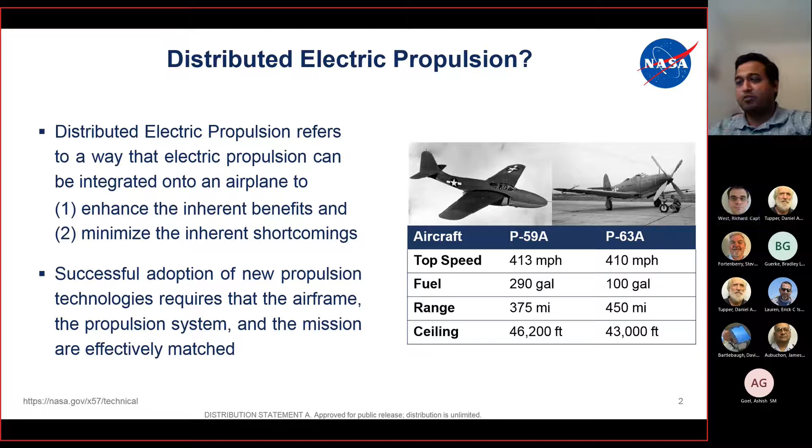So I have a couple of examples here for actually fuel-driven aircraft. So one is the P-59A, the other is the P-63A. If you can see, I'm not going to go into the range there. It's just their specifications that's listed. So we'll compare this as we go forward. So this is one of our reference points.

So moving on to the next slide, it's talking about the X-57 Maxwell as well. So to begin with, this airframe already exists. So it's one of the most successful twin-engine propeller-driven airframes that exists already. It's called the Tecnam P2006T. So it's an Italian-based airframe. It's manufactured in Italy, and it's like one of the tried and tested reliable twin propeller aircraft around in the market today. So the reason NASA chose this is because this can be easily customized.

And by tweaking the airframe of the P2006 Tecnam, NASA is trying to demonstrate the X-57 Maxwell design, which is the first all-electric experimental aircraft that the agency has produced in its X-plane series. X-plane refers to a series of experimental planes that were designed by NASA for different purposes.

For example, in one of my previous presentations, I talked about QueSST, which is the quiet supersonic version of the aircraft that's been created by NASA for experimenting as well. So this is one of the X-planes. It's like an ongoing research. One of the latest things that are going on in parallel with QueSST as well.

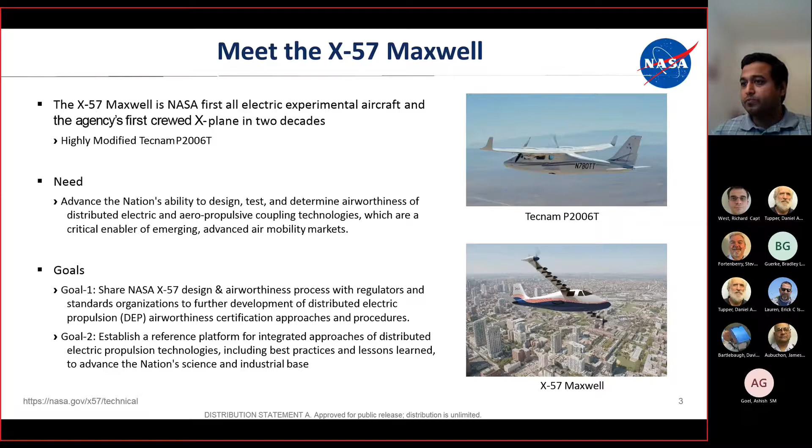So the next goal is to establish a platform for electrical propulsion. So by studying that, you can always get the best practices and you always learn lessons from it. So that's the two goals of it. So NASA is not looking to mass produce this at this point. It's just going to be an experimental aircraft where we can learn a lot of things so that other manufacturers can actually use it in the future.

So this is a big project, spread across various NASA locations. For example, NASA Ames, we are very well known for our wind tunnels, so aerodynamic analysis is happening here. But as you can see, there are other NASA divisions participating as well. The big one here is the Glenn Research Center, where most of the battery related technology and research is happening. And then Langley and Armstrong have their other facilities where they look at the instrumentation part of the aviation as well.

And there are other organizations here. The most noted one is the last below, Tecnam. Tecnam is the airframe that we're going to use. It's the baseline commercially off the shelf airframe that's available in the market today, as I said. So we are pretty much distributed around the country and even in Italy, so across the globe.

So the research study so far says that we can achieve 5 times improvement overall. And if you see, the efficiency of an internal combustion engine aircraft or a propeller driven aircraft is in between 30 to 50%. So we are trying to increase this to somewhere close to 90% or more. And that's where electrical propulsion comes in; that's one of its selling points. So we have to understand a term called lift to drag ratio here. We are trying to improve that.

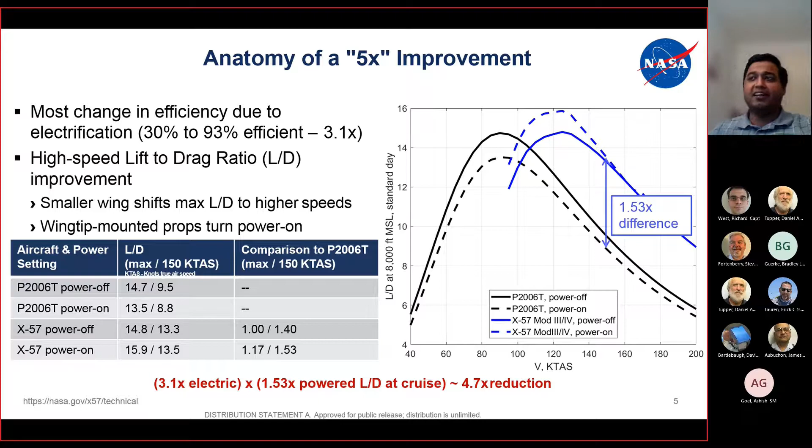So one of the things we are doing is altering the shape of the wing. The lift part and the drag part are mainly controlled by the shape of the wing. And of course, in almost all aircraft now you can alter the shape of the wing by using the flaps, right? Depending on what part of the flight you are on, whether you are on a landing profile, takeoff profile, or cruise. So basically, that's what we do here as well. The beauty is that lift to drag ratio is directly dependent on the shape of the wing. We will explain that in detail in the following slides.

So as I said, wings make all the difference. If you see the airframe of the Tecnam P2006T, the area of the wing is 159 square feet. And there is a term that we should understand called wing loading. In aerodynamics, wing loading is the total mass of the aircraft divided by the area of its wing. So we can say they're directly related.

Consequently, faster aircraft have higher wing loading than slower aircraft, which is why you see in jet aircraft the wing is more swept. Slower aircraft, like the Cessna 182 we use, have straight wings with a sweep angle of almost zero. That's one of the wing loading parameters as well. And so the point is we have to increase wing loading to achieve efficiency and weight distribution as well.

But unfortunately, we cannot change the shape of the wing as it is. It will compromise other things. It will really impact your takeoff distance, for example, your runway length, landing distances as well. So it's not straightforward. That's why we have to couple this with distributed propulsion as well, which I will dwell on in the next slides.

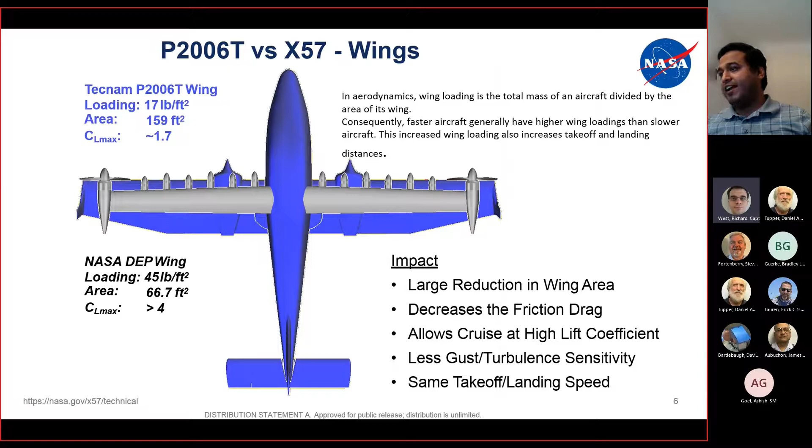So if you want to achieve the same lift with a shorter wing, you need more speed, right? So you need more power. So we have to match the Tecnam airframe's takeoff and landing speed. So we have to modify our wing loading accordingly.

So what NASA has done is they have actually broken this into several phases. They call it crawl, walk, and run. You see that there are different mods here: mod 1, mod 2, mod 3, and mod 4 for X-57. We start with mod 1 to collect data. This is going to be with the Tecnam profile. Nothing is changed here. It still runs on fuel. The wing does carry the fuel here. It's just the stock aircraft from Tecnam. We are going to fly that and take as much baseline data as possible.

Moving on to mod 2. Mod 2 is also relatively close to mod 1, but the only difference here is we replace the fuel-driven propeller engines with motor-driven engines, and we collect data for that as well. That is another baseline for electric-driven propulsion. But this is again not efficient at this point because we have not customized the aircraft totally for efficiency. So that's where mod 3 comes in.

Mod 3 is where we have independent propellers assigned underneath the wing. At this point, the wing is changed as well. And what you can see in mod 3 is the same electric motors are actually installed on the tips of the wing rather than the internal part of the wing. And that gives you one set of data as well.

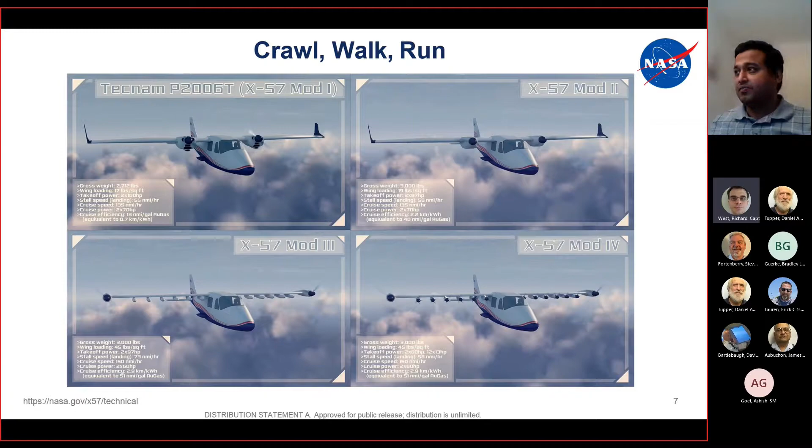So finally, we try to get to mod 4, which is close to what we are expecting in terms of our research. Our research culminates at mod 4. What happens here is we have distributed propulsion systems that are outside, and they rotate as and when power is needed during a phase. And so those are the four mods, or four phases rather, for Maxwell X-57.

So this slide talks about the motivation. There are a lot of barriers in electric propulsion. It's not easy. It's not like just installing a motor to a wheel in a Tesla car, for example. The challenge is much more. We have to see the battery density as well, and it's very easy to deplete the battery in mid-air because of the battery density. You have to fight with mass, you have to fight with energy density as well. So choosing something that's going to be optimum is really tough research that's going on right now.

So as I said, we have weight, safety, and flight environment challenges, which complicate our battery design, especially when we are using COTS technologies, that is commercial off-the-shelf technologies. What we need is a high voltage lithium battery series with intrinsic propagation prevention and passive thermal management. I'll tell you why these two things are really important, because as opposed to a car, this is going to be on an airplane.

So we cannot accept any kind of explosion or fire that's going to occur in the battery because of its thermal properties or short circuits or other electrical phenomena that happen around the batteries. So even if something deforms on the battery side, we have to make sure that we contain it within the shell, and it's not going to propagate all through the aircraft. That's another thing. We have to establish motor, inverter, ground as well during the flight test program. That is to make sure that we don't have any leakage current coming around.

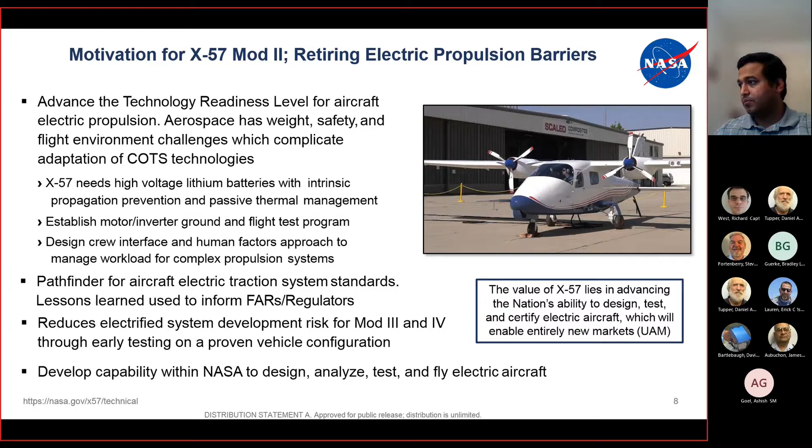So I had briefly touched upon it in my previous slides, but the cruise motor has a lot of challenges that we have to address as well. So we have to look at design standards for electrical propulsion. We don't have one established right now. We don't have a sourced electric motor already in the market right now which can be put in, so we have to develop this motor from scratch. We have to design it and we have to test it as well.

We anticipate it's going to be a dual winding motor architecture for aerospace applications. So we have to make sure that this motor mitigates the effects of component failures. So we do require extensive validation as well. And for the testing standards, X57 developed an electric motor testing approach. So again, we document everything in our lessons learned. And also there's a testing standard called ASTM F39.05.

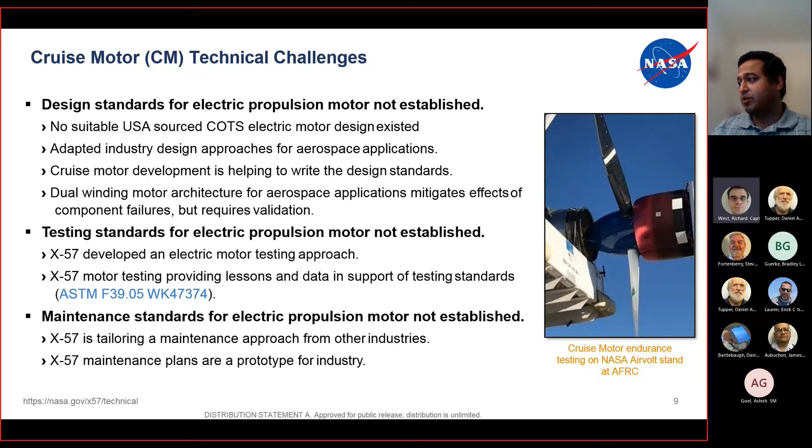So coming to testing, testing is just one point. What happens after deployment? We have to maintain it, right? So we have to maintain the standards for electric propulsion for X57. That's something we have to take care of as well. So even after this aircraft has been deployed, we continuously keep studying it so that we can establish the maintenance standards as well.

So the flight motor, as you can see, is already in Rev K, which means a lot of design has occurred from scratch. The prototype is evolving, and we have the 11th major design iteration as of now. So we have to cool the electric motors as well. We are using passively cooled technologies like air cooling for the motors right now, and we are studying the data we observe from that in terms of heat management. Performance of the motor, efficiency and torque, are difficult to capture due to electromagnetic interference and high frequencies being present in the data. So we have to make sure that we shield that.

Of course, coming to motors, although it's simpler than an internal combustion engine, it's still a laborious process in terms of winding and getting the stator and the rotor in place. The magnetic fields in the motor, they're all very challenging things that we have to address. I'm not sure what kind of motors they're going to use. I think they're going to be some kind of DC series motors or some kind of motors that are high speed. So I'm not really sure on that point, but I can elaborate on it as I get more data in other presentations.

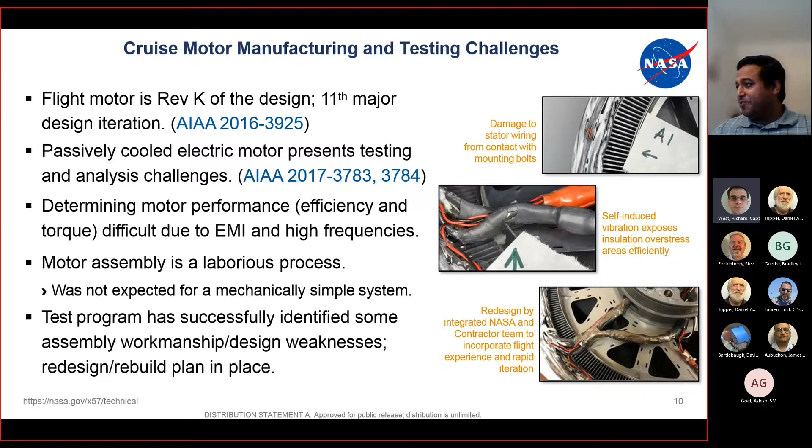Kailash, can you just go back a slide just a moment? Sure. I just really have to appreciate the caption on that second photo there. Self-induced vibration exposes insulation overstress areas efficiently, which is pretty much NASA speak for the damn thing shook itself apart. Yeah. Thanks for highlighting that. I did not go over that, but yeah, I thought that those were very specific to motors and windings. So yeah, thanks. Good that you brought it up. Thank you.

So we have to have a motor controller as well for driving these motors at different speeds according to the profile of the aircraft. Electric aircraft operation requires high efficiency power conversion from the battery to the motor. So we have to have a very capable motor controller to do this. Again, we have technical challenges in this. What kind of technology do we use? One of them is using a silicon carbide based MOSFET, which is nothing but a switch. It's a high speed switch that's going to change the power levels to the motor so that the speed can be controlled.

And then the next one is, of course, the cooling. So cooling is something which we have to address. At this point, we are looking at passive cooling, but we have to see how it proceeds. Then we have safety critical software that controls all these things. Software has been our pain point in NASA missions, especially with Boeing, right? Software has been an issue not to skirt over. It's completely powered by electric motors and they are controlled by software. So extensive testing is needed at this point as well.

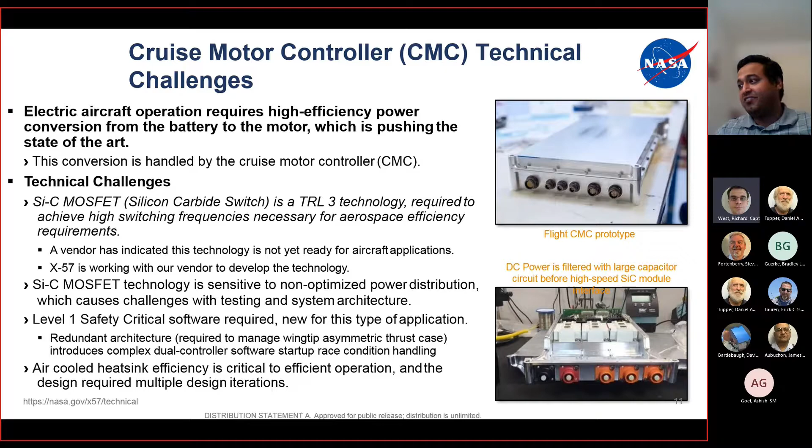So what we are looking at is, again, a very, very important thing in aviation, redundancy. So how are we going to achieve redundancy here? I'll come to that. I have a separate slide on that. So just food for thought at this point, we need redundancy for everything. That's how we do things in aviation.

This slide talks about the challenges in manufacturing and testing. So manufacturing challenges, as I told you, few COTS components. The airframe itself is a COTS component, but several other things are not. Coupled to that, we have long component lead times due to high demand and limited production. Of course, there are subcontractors. The scale of the project is like that. Not everything can be done within NASA in-house, so they have to port so many others. The supply chain comes into play as well.

So NASA engineers and aircraft electronic technicians and contractors are working to bring this project to life. This is not going to be done in one iteration. We have to build the data and test it over several iterations to achieve it. Other testing challenges, again, prototypes. We have to manage our risks. In early iterations, you have more risks. So we have to develop a risk reduction testing framework. And also flight-like testing is difficult to achieve because we have high power requirements here for motors.

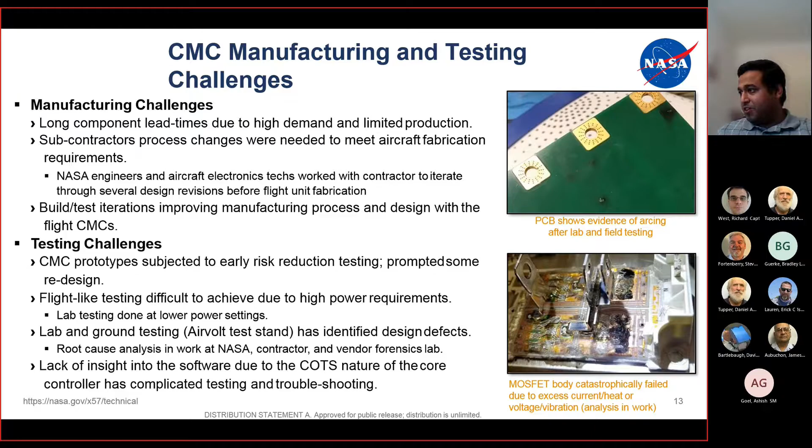So this is the main thing, the flight batteries, the testing challenges and the technical challenges. So as I said, the number one challenge is we don't have a commercial solution yet for battery systems. So we don't have a stock battery like what we have for the Tesla cars. Even Tesla took several years to actually come up with one, right? So yeah, battery technology is something which is evolving day by day, and the learning curve there is pretty huge.

So what happens when we consider a battery for an aircraft or airframe? So we require high power requirements with flight weight limitation. So we have to achieve 461 volts at 47 kilowatt hours effective capacity, and at least supporting a load of 859 pounds. That's 16 modules and 51 pounds each. So there are 16 battery modules which you are looking at.

So aircraft propulsion requirements drive design solutions to a higher voltage and current rather than the comparable automotive or auxiliary aircraft operations. So as I said, right, the profile for aircraft is going to be way different than an automotive. We are looking at an industry target of 30% packaging overhead that aligns with the budget.

The other thing we have to look at is the thermal runaway aspect of the battery. So thermal management has to be looked at as a critical design driver for X57. So we have to make sure that the batteries are cooled, the motors are cooled as well. So if we don't cool it, there is a chance for thermal runaway, and there's a chance of a fire hazard that's going to happen during flight. And for that purpose, we have to monitor that using a software and a control system.

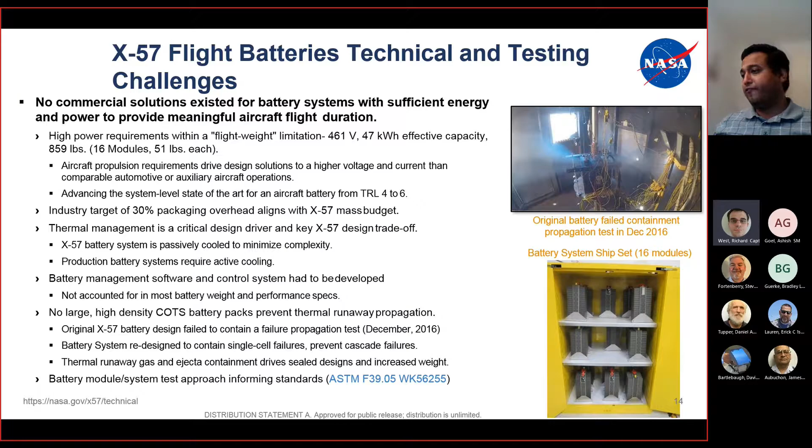So this is what has occurred during the first propagation test that was conducted. So they had to completely redesign the battery system to contain single cell failures, as I said. So a fire can happen, but you have to contain it within the case of the battery itself and make sure that it doesn't propagate anywhere outside to another cell or to other parts of the aircraft. Extensive module system testing is required here as well. So that's the standard there. You have to achieve ASTM F39.05.

So what started as an original approach was inadequate, so we had to move on. So the major lessons learned there were in the aviation battery development. So, for example, use of lighter, more energetic cells can pose greater safety risks. Cooling of cells while minimizing cell-to-cell propagation is also a risk. So containment of gases, that's another safety hazard here. That, and then thermal management and containment.

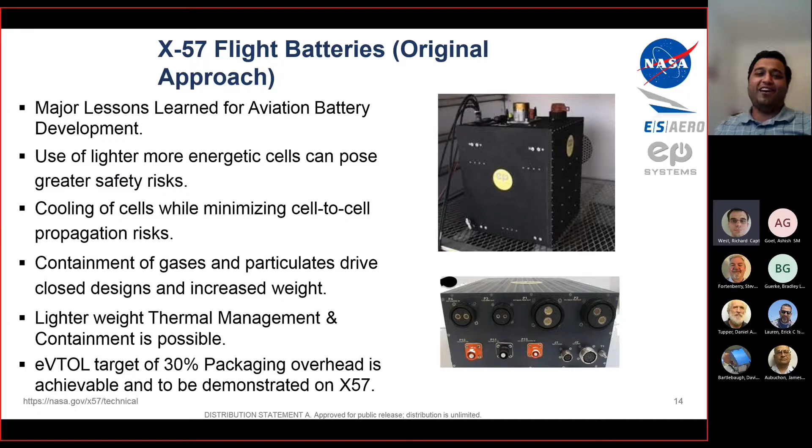And for the eVTOL target, that's the vertical takeoff and landing target of 30%. To achieve that, 30% packaging overhead is achievable, and it's demonstrated on the X57 as well. So X57 is not a VTOL aircraft, but we are trying to build in some capability where we can match some kind of profile for VTOL.

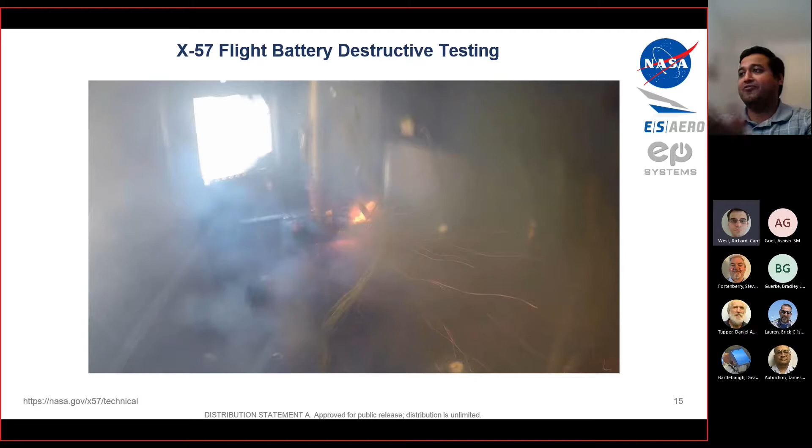This is one of the tests where the destructive testing was carried out in the airframe, and as you can see, the fire again. I don't think this is acceptable. The fire is actually visible outside the cell.

So based on the learnings of what we had originally, we are now zeroed in on what we require for our battery. So we are looking at 461 volts, 47 kilowatt hour effective capacity. We are looking at a total weight of 860 pounds for 16 modules at 51 pounds each. So we are looking at 2 packs of batteries that support the traction system. So again, I talked about redundancy. So we need 2 packs that are completely isolated from each other. So if one fails, we can always feed on the other.

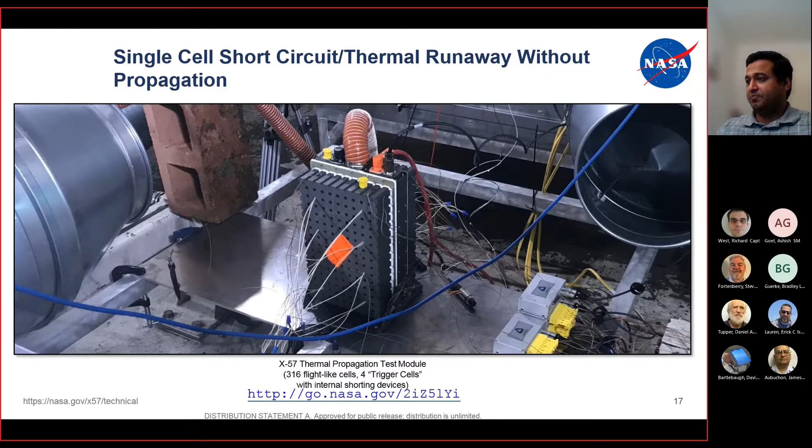So this is the test on the thermal runaway condition without propagation. So this is actually a video, and there's a link. You can always refer to it at a later stage.

And I was talking about redundancy. So the main thing here is how we are going to achieve redundancy is to have two sets of battery packs, a battery pack A and a battery pack B. The total thing is called the main battery system. So the aircraft can be driven by either one of the battery packs working at the same time. So it will give you enough flight control power to actually glide down in case the other battery pack fails.

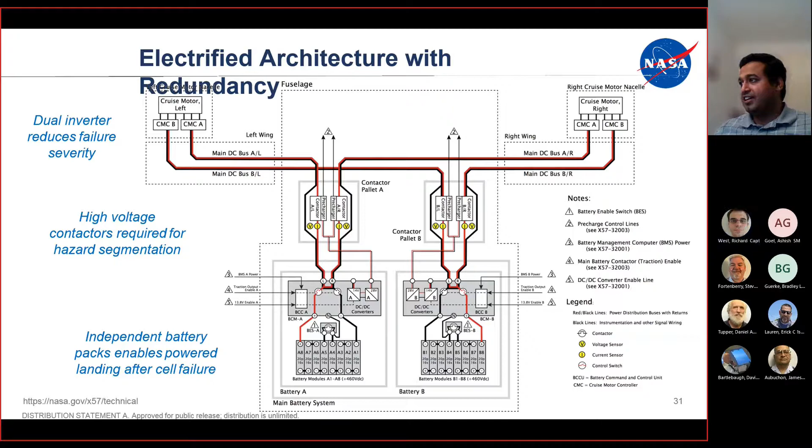One thing we have to address here is these two battery packs are in close proximity. So if one goes on fire, we have to make sure that the other one doesn't catch up with any other safety hazard. So this is the electrical diagram. I'll leave it to you to actually see it at a later point.

So this one I had briefly touched upon as well. This is a system that's going to finally tie up with our G1000. So basically, they have their own UI to see data of the batteries. So they have a CAN bus, which is nothing but a controller area network. So that's the network within the aircraft to actually collect data. It's pretty similar to what we have in cars as well.

So in cars also, in automobiles, we use controller area network as well to get the data from various embedded components. So typically we can read data from the motor controllers, the battery management system, the throttle encoders as well. So the MFD provides non-safety critical situational awareness for the pilot. So here, situational awareness is also relevant to the health status of our batteries and motors, in addition to whatever situational awareness we are taking care of as a pilot in our flights, for example.

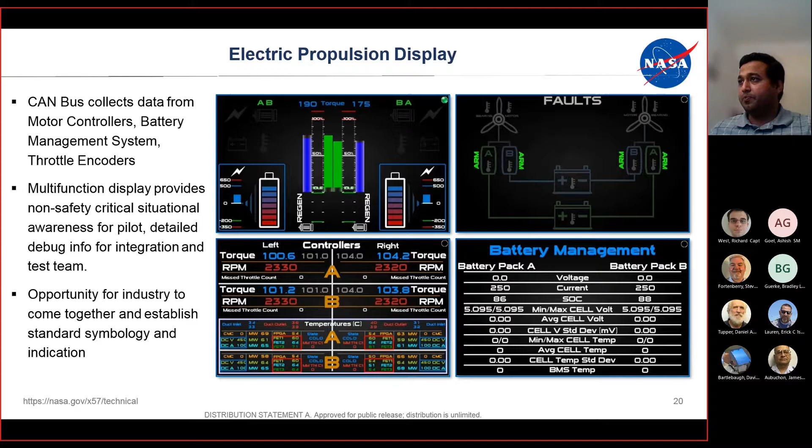So this is an opportunity for the industry to come together and establish a standard. So we don't have something like this in the industry right now. So if the CAN can be further enhanced into another network or a standard, which can be used in electric aircraft. So that's something we are looking at as well.

So these are some pictures from the Mod 2 vehicle integration. So as you can see in the Mod 2, there are different sensors that are being installed. So we have strain gauges, accelerometers, air data probes. Of course, there are modifications to the cockpit because we need a digital display to see battery performance and the controller performances, and then throttles as well.

And then in Mod 2, we have the motors installed. These are the main two motors, the bigger ones. And then you can see some pictures of the throttle as well. So we're trying to keep it the same way as our traditional aircraft feeding in the throttle. But the only thing is this time we're going to control the speed of the electric motor.

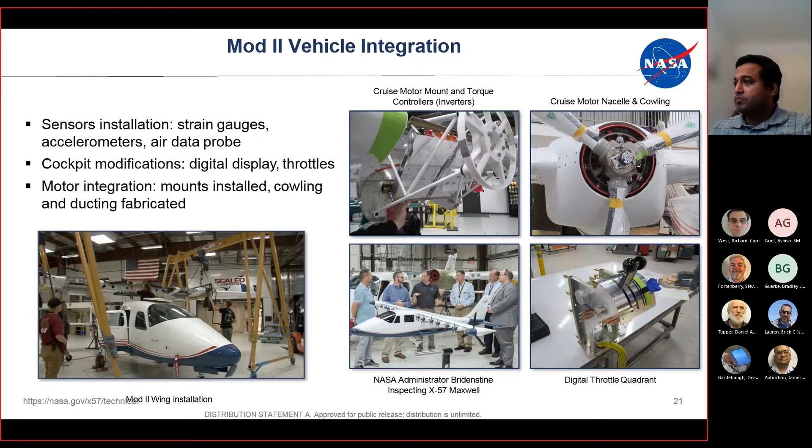So for the Mod 3 and 4, we are looking at the following motivations. We are trying to leverage distributed electric propulsion. So the first point is mature distributed electric propulsion system architecture. So NASA will tackle the technical challenges of operating multiple motors with the industry standards that are there today. So try to match them as close as possible.

So validate higher power electric propulsion system operation. So we are looking at 120 kilowatts in Mod 2 and 250 kilowatts in Mod 4. So I'm talking about the power distribution to the individual small propellers that are there in the center.

And then we are looking at exploration of novel optimized configuration enabled by DEP, thin haul and large scale. So exploration of wing tip propulsion vortex interaction. For example, we have the vortex on the tip of the wing, right? So that's one of the reasons why we push the main two propellers to the edge of the wing to minimize the vortex. So they believe it's pretty similar to what we do in our modern aircraft, right?

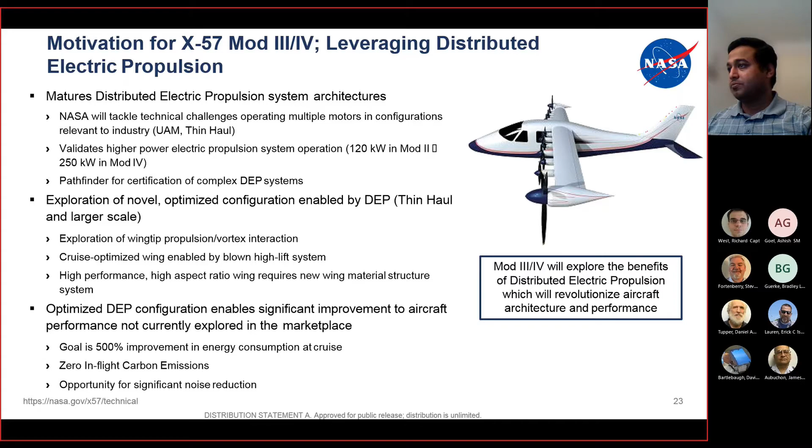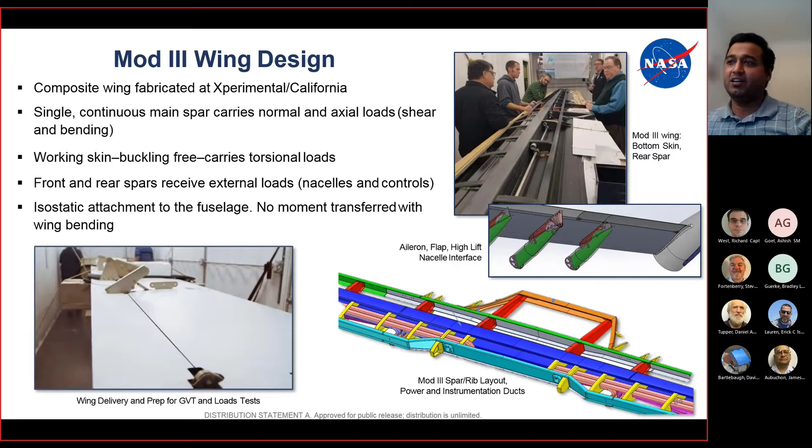Again, they're talking about the working skin, the front and the rear spars for external loads. Also, the image below is the isostatic attachment to the fuselage, how we are going to attach this wing to the fuselage. So we have to take care of how much weight bearing capacity is there in the wing as well. Of course, the wing will have an aileron, flap, everything, and nacelle interface. The nacelle interface is nothing but the small propellers you can see in the bottom of the wing. And they can be deployed as and when power is needed.

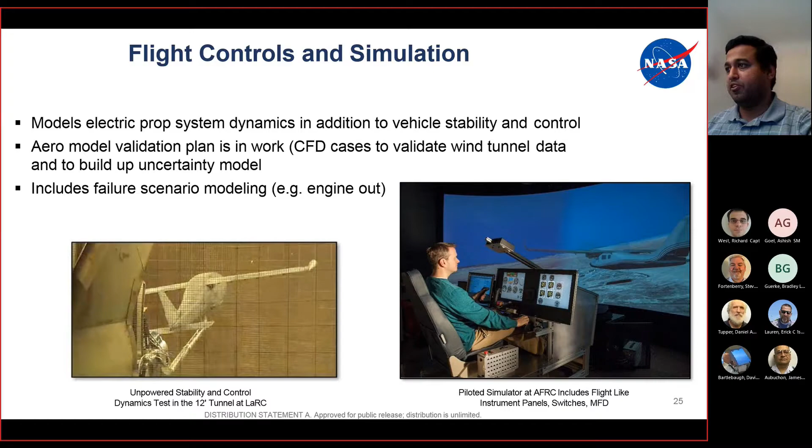Of course, we cannot do everything on the runway and actually fly in our initial stage of research. We need a simulation software with flight controls. So that's something AFRC is doing as well, to give lots of data from a simulation perspective. So this includes, of course, the failure scenario modeling. Suppose what happens if the power goes out on one of the motors or the battery fails.

So the next slide is how are we going to achieve lift using a distributed electric propulsion system. So the high lift propellers are designed very differently from traditional propellers. So uniform velocity profile versus most efficient thrust velocity profile is something we have to look at. So these motors here, the high lift nacelles, are the small things that are attached to the bottom of the wing. So they come into play only during the aspects of flight where we require more power, for example, takeoff. So that's when they come on.

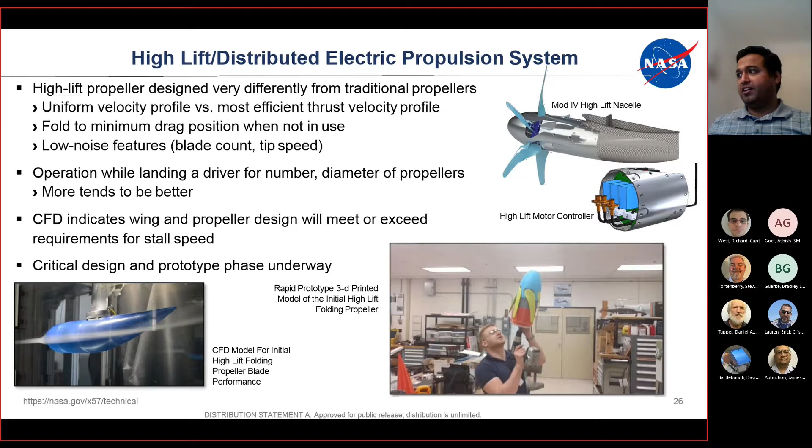And we have a number of different small propellers here underneath the wings. We can fine tune the amount of power we really require at different phases of flight. So again, these things come in the research of the flight profile itself. So these are the designs that are going on right now for the high lift nacelle.

So what happens during landing or just before landing? If we deploy flaps, again, you're going to slow the aircraft down. To achieve this, you need some distributed propulsion system to have the same effect as well, because the area is again not huge. To compensate for that, you need additional power. And that's how the small propellers will come into play there as well. And as I said, in cruise, they are stowed. They are not used.

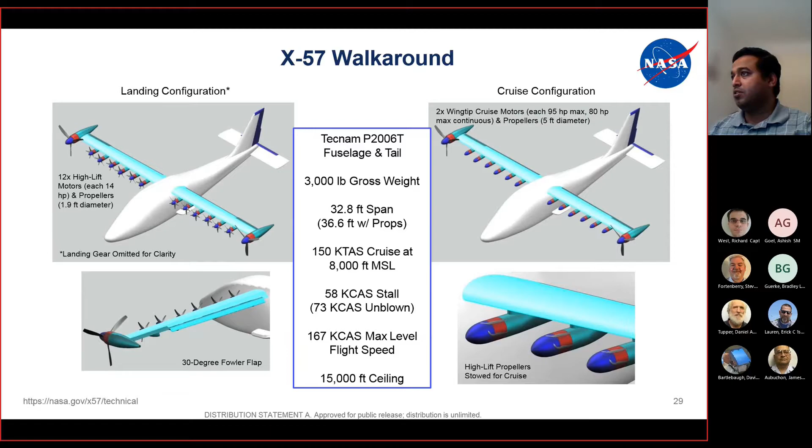So in the Tecnam P2006T, these are the parameters that are existing. We have considered research based on 3,000 pound gross weight. This wingspan is going to remain the same. It's going to be 32.8 feet in span, and we have 36.6 feet between the main propellers. We are looking at a cruise speed of 150 knots true airspeed at 8,000 feet MSL, a stall speed of 58 and a max flight speed of 167 at a ceiling of 15,000 feet.

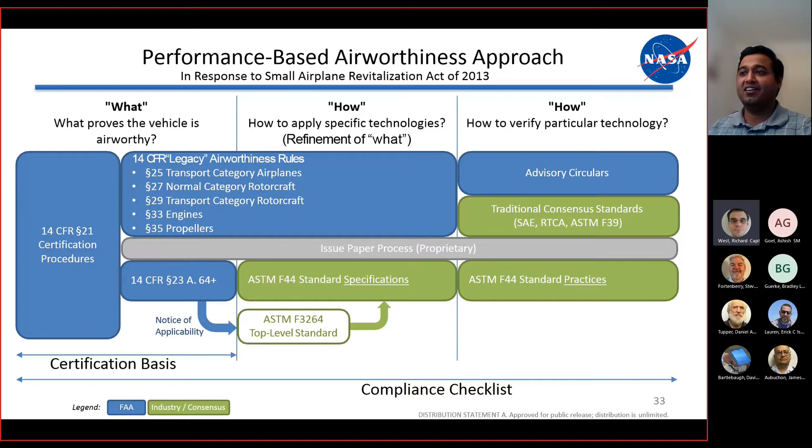And these are the standards that are going to get updated based on electric flight. So the FARs are going to get updated based on this research. I think the inputs are going to be pretty large once we get to electrical propulsion, as you can see from the number of standards and CFRs that are going to be impacted.